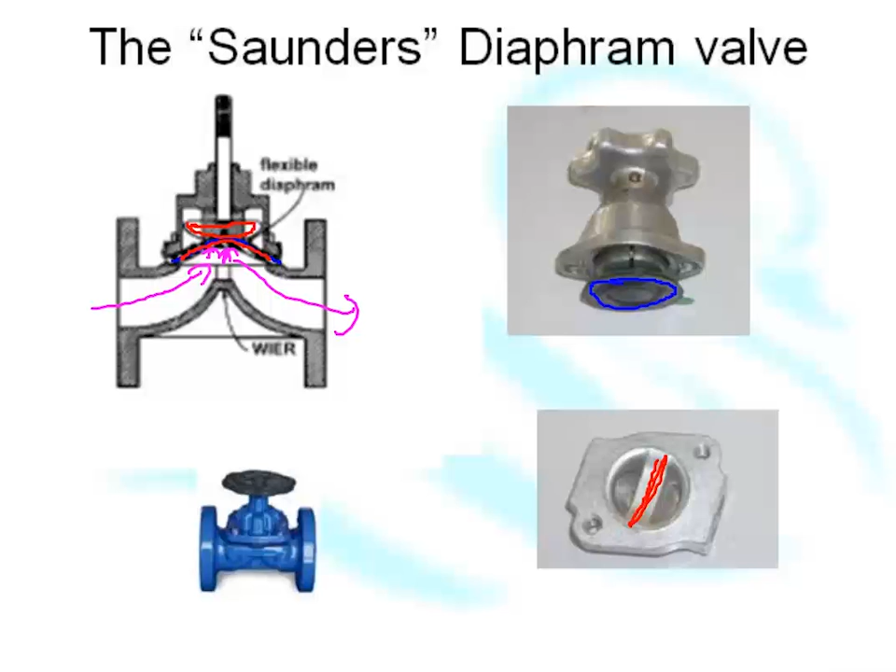Here is a pinch valve. Now I'd like to know if any of you had experience with pinch valves. Okay, a pinch valve is another one of the many valves that were designed primarily for small applications. The nice thing about a pinch valve, it's like the Saunders valve, is if you've got nasty stuff on the inside, it can't get out. There aren't any seals anywhere. There aren't any seats that it can work its way past or anything like that.

It's basically a big rubber pipe, and this is the rubber, oh, I didn't show it yet. So it's a big rubber pipe here, and what we do is we pinch the pipe shut. There's a couple of ways we can pinch that pipe shut, but with the larger ones, the way we basically pinch it shut is by having two pieces of metal. There's one there and there's one on the underside, and these pieces of metal are called deformers. And you push those two metal deformers together and it pinches the pipe. Easy.

They work quite well, except for if you get any sort of grit or nastiness. There's a rail down each side. If you get grit and sand on those rails, they seize up. If you've had it shut for a long time, just like the Saunders valves, the rubber tube gets a memory. So here's one, and I've had it shut for a long time, and I'm going to open it, so I move the deformers away, but the rubber just stays shut, because it's remembered where it was. It's basically sticking there and it's going to stay.

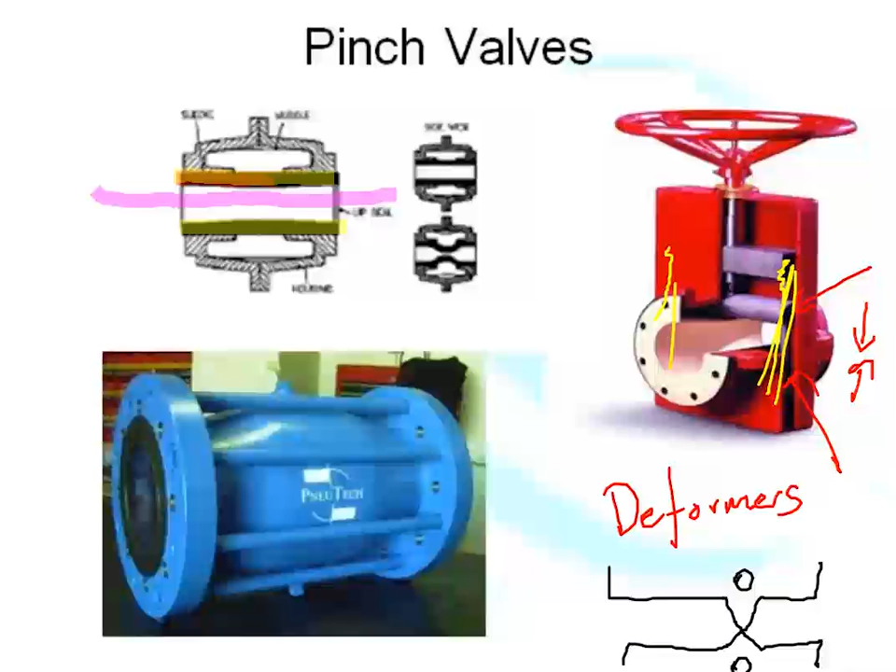They do also sometimes burst. If you put mineral sands through, some of the mineral sands have got crystals with very sharp edges on them, and those sharp crystals just cut away things like rubber. But they have the advantage that until they burst, the stuff stays on the inside.

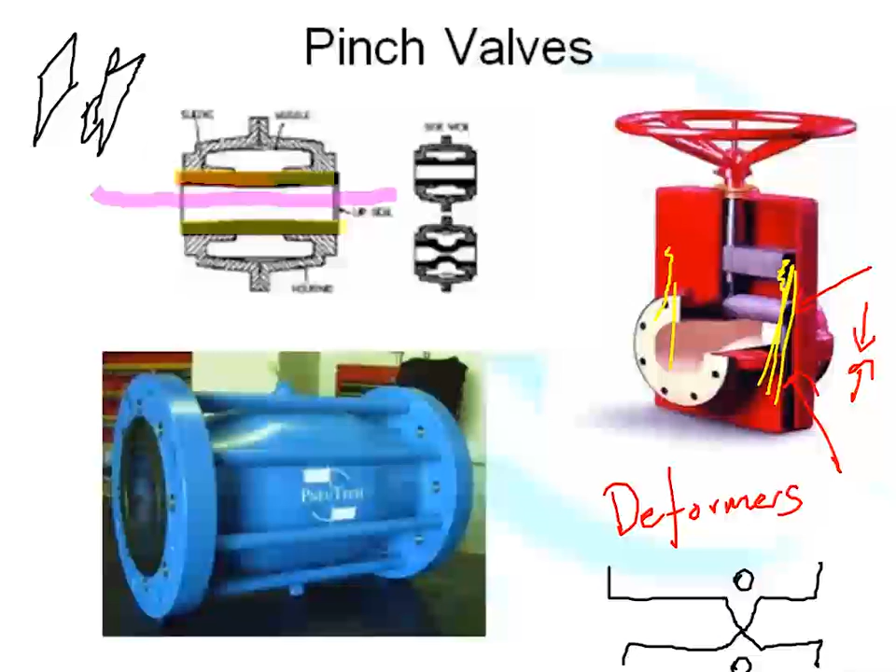Now I want to talk about a couple of problems that we get with all valves: cavitation and flashing. Cavitation and flashing are things that occur when the valve is nearly closed. One of the main causes of cavitation and flashing, of course, is that we bought a valve that was too big. If you buy a valve that is too big, you'll tend to be opening or closing it only around the very short part of its stroke, and so it will be nearly closed.

Another cause of cavitation and flashing is if the valve leaks. If the valve leaks in any way, then you will get cavitation and flashing. It's caused when thin streams of liquid go from high pressure to low pressure. So whenever you have a high pressure to low pressure situation, which is what you get when the valve is almost closed, you get these two problems called cavitation and flashing.

Now, other places where you get cavitation and flashing, it's not unique to valves. Other places where you get cavitation and flashing is pumps and propellers. I think I may have spelled that wrong. Is anybody familiar with cavitation and flashing on pumps or propellers?

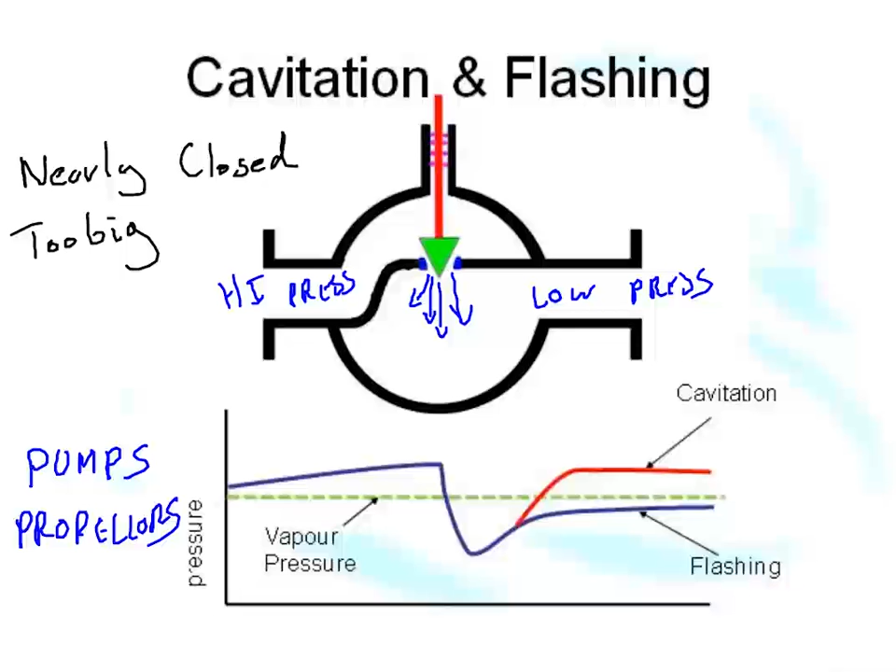Okay, now you know when a pump or a propeller is cavitating because it makes a noise. And we're going to go into what is exactly occurring there. What's occurring is, actually I can show it on here, if you reduce the pressure of a liquid, so here's the liquid going through the valve. It gets up to the plug, and then just here it goes through the plug. Now the liquid pressure goes very, very low.

If you reduce the pressure of a liquid beyond a special line, which is called the vapor point, then that liquid turns into vapor. So we've reduced the pressure to such an extent, basically, we aerosoled the stuff through there, and it vaporized. So we reduced the pressure beyond the vapor pressure point, and it turned into vapor. It turned into bubbles.

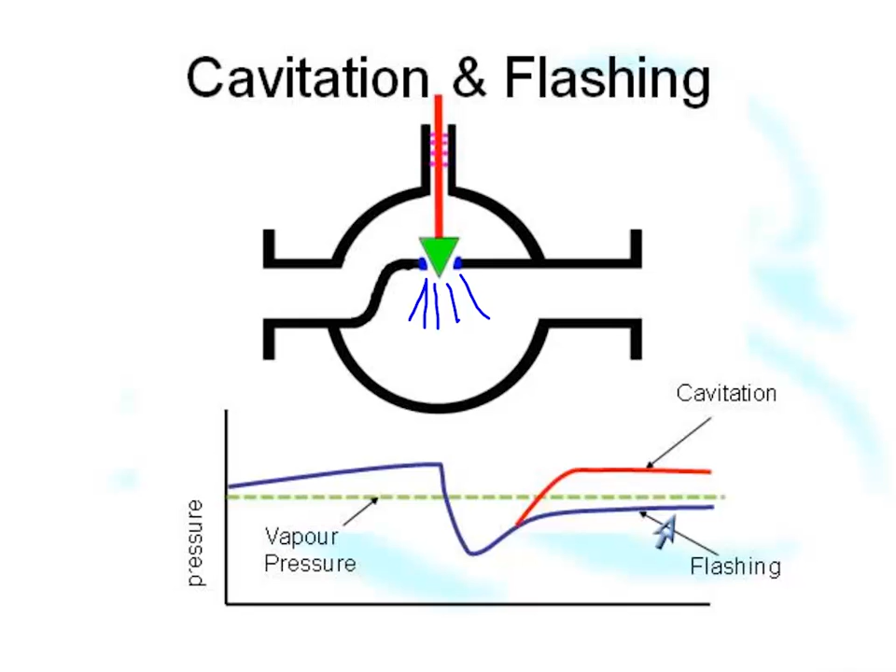Now, with cavitation, we then repressurize. And we repressurize to above the vapor pressure point, and so we turn back into liquid. With flashing, we don't repressurize enough, so we don't turn back into liquid. Flashing is permanent formation of vapor. Now this is what happens with cavitation.

A small bubble forms. The bubble then goes along and maybe gets a bit bigger. Then it repressurizes. And when it repressurizes, the bubble implodes. Now, the bubble doesn't implode nice and gently and slowly disappear without bothering anybody. The bubble actually implodes, bang! It implodes at the speed of sound.

And so what it does is, it makes a little tiny sonic boom. Each bubble imploding makes a tiny sonic boom. And then you get these shock waves spreading out from the bubble, like tiny sort of Star Wars special effects shock waves coming out. Now they very, very quickly dissipate away to nothing, these shock waves.

However, if it happens to have imploded next to a piece of metal, there's enough energy in that shock wave to vaporize a cavity out of the metal. It just carves a little chunk out of the metal, as if somebody has attacked the metal with a tiny weeny little ice cream scoop. That's why it's called cavitation, because it makes a cavity.

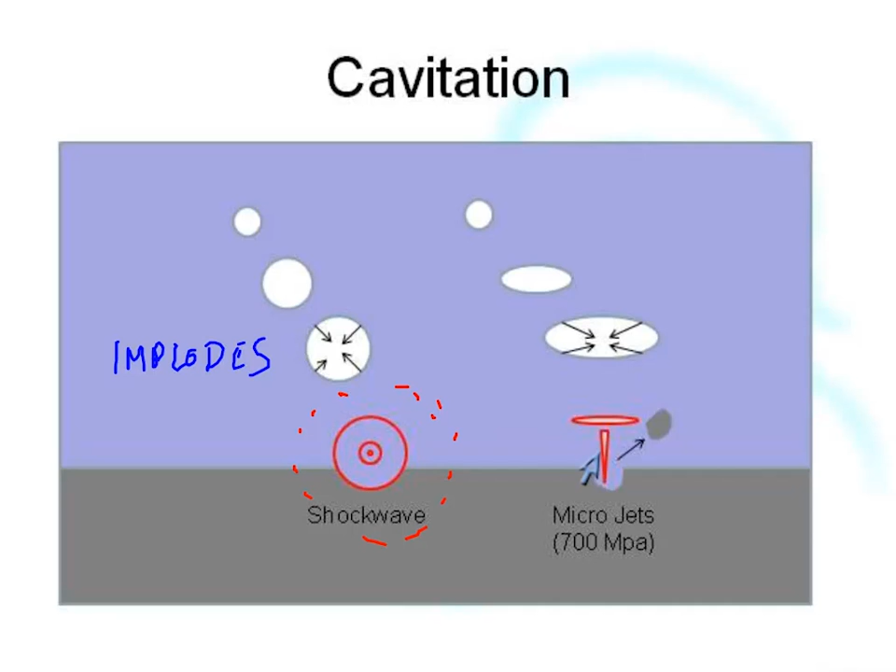Now, a slightly different thing can occur if the air bubble happens to be a little bit flattened. Then when that implodes, it causes what's called a liquid microjet. It's minuscule compared to a human hair. It's a tiny, weeny little microjet. However, it's got 700 megapascals of force behind it.

That microjet, if it happens to be near a piece of metal, will just chuck that metal away. It will just make a hole in that metal. You can't fight 700 megapascals. It's like a tiny weeny little liquid hammer, little jackhammer, and it just knocks a piece of metal out. So cavitation will either cause these cavities like this or rougher cavities like this, depending really on the shape of the air bubbles. Either way, it's chewing the metalwork away.